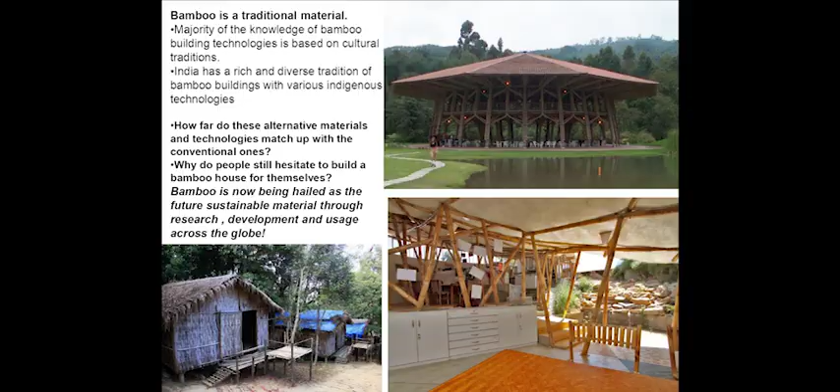I prefer the term bamboo in Indian architecture rather than bamboo architecture, because bamboo is one of the materials in architecture and has to work with all other materials. Only then can we actually mainstream the material. And though it was a very important part of our traditional architecture fabric.

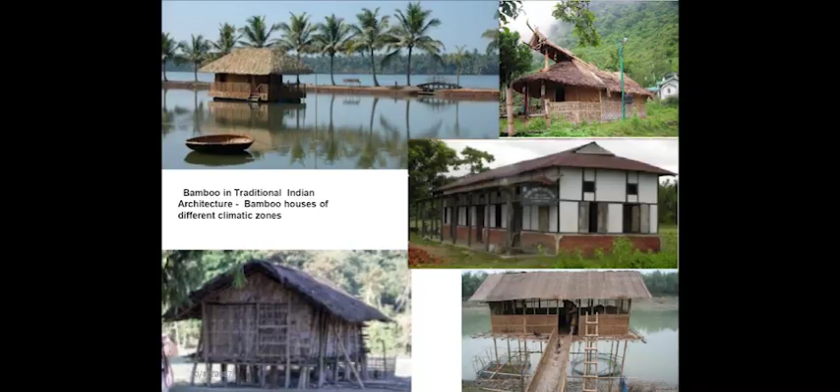It is always better to term it as bamboo in Indian architecture. My presentation has approximately 4 parts, starting with the traditional value of bamboo in our traditional architecture, and how different climatic conditions give rise to different typologies in this country. Then last year we tried to evaluate how to mainstream bamboo, because that is one of the main problems we architects face - the acceptance of bamboo in the architecture and building field is very, very less.

So we did a global survey, which I will share with you. Then I will show some of my key projects, and in the end we have a 4-minute video of one of our latest projects that we are doing. So we'll just quickly start with our presentation.

Bamboo is a traditional material in the tropical, subtropical, and subtemperate parts of the world, and is a very important part of our lives, more so for housing. In our part of the world, bamboo was primarily used as a structural material for housing - it gave us beams and columns in different parts. We have a very rich and diverse tradition of bamboo buildings with various indigenous technologies.

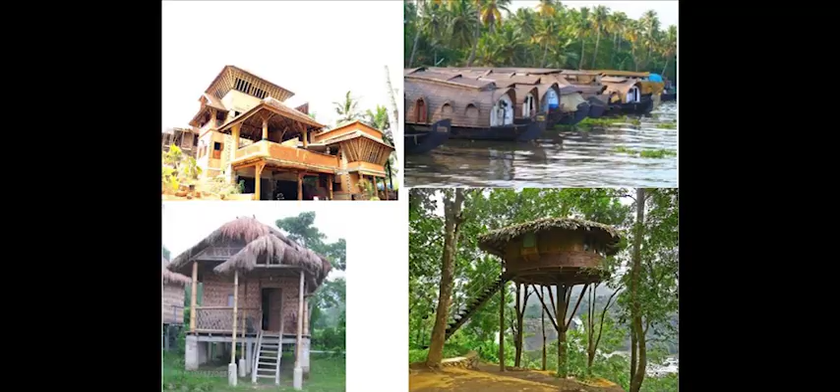Now the question this paper addresses is how these alternate building technologies can be mainstreamed, unless we understand the value addition - if we are going to replace something like factory-produced cement and steel, can we give the durability factor and other factors of comfort with materials like bamboo and mud.

Only then will people actually be ready to replace other materials with this, because some time ago cement was the alternative material and bamboo and mud were the mainstream materials. Even now in many parts of the world it is still so. How do we change it back?

This slide shows that when we say bamboo and mud, the kind of shack shown at the bottom is what comes to people's mind. On the top right is Simon Velez's pavilion at the 2000 Expo Hanover, done about 19 years ago at the turn of the millennium. And at the bottom right is my office, which is the last project I'll be showing.

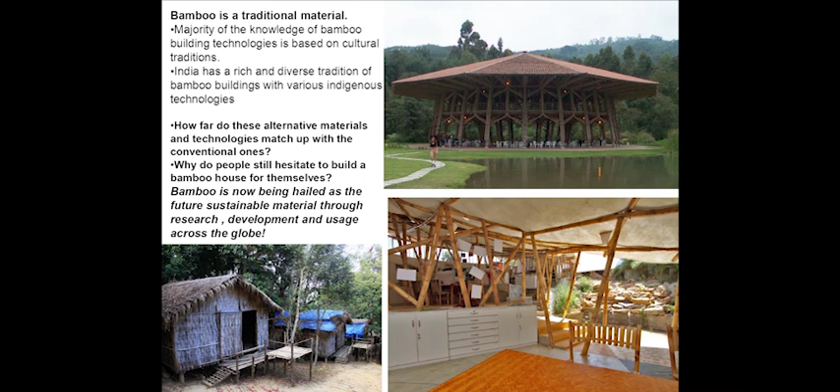These are the different traditional usages of bamboo in architecture in India. We have five different climatic zones, but the typology of bamboo buildings in India would probably be more than 150. This is because in the industrial world we think one technology and one solution fits all, whether it is New York, India, Bangalore, or the Northeast.

We think we have one solution that will fit all, but when working with natural building materials, it is not so. We have to be more sensitive toward the material and how to deal with it. These traditional solutions were found by people who had access only to the materials around them, with limited communications and transportation, and they solved their own problems of climatic comfort. These indigenous technologies are really time-tested.

I want to differentiate between two things: something tested in a lab that gets a scientific result is called knowledge. But something tested for thousands of years in live conditions, in live climate, is called wisdom, and that comes from experience. Knowledge might fail, but wisdom will not.

So what we need to do right now is combine the two - combine the wisdom gained through our traditional buildings with the scientific knowledge of the industries and laboratories, and come up with something new.

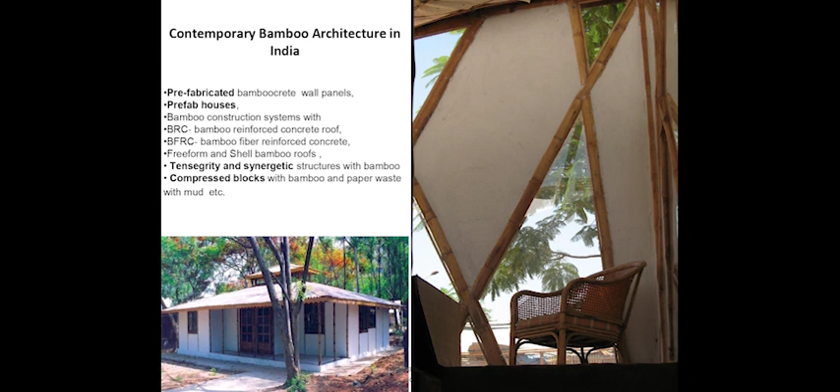The left one is again from Nagaland, and some of them are from Assam. The one on the right, at the bottom, is a house from Bangalore, more than 200 years old. You can see bamboo in the roofing there, combined with teak wood, which is a hardwood, but bamboo is also surviving for 200 years. It has not been changed. It has a limestone slab over it, and the house is in active use at the moment, 200 years old.

So when you talk about bamboo being absolutely temporary for a building, we really have to think about different construction systems to make it permanent in the long run.

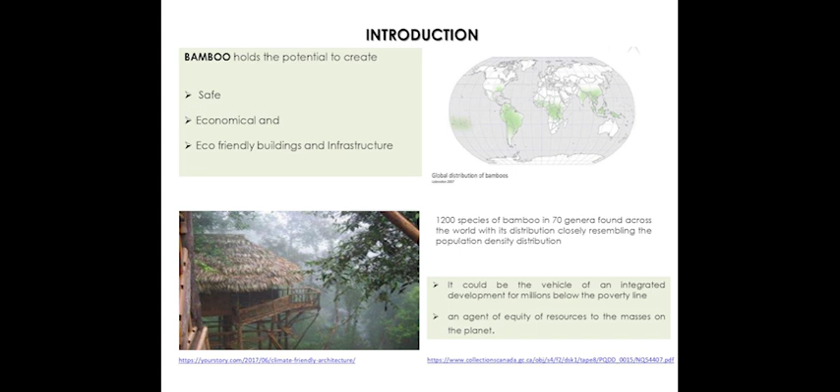These are some of the technologies we are trying to work on: prefabricated bamboo houses, prefabricated bamboocrete wall panels, which could be one new industry for multi-storied buildings. Prefab houses, bamboo construction systems with bamboo reinforced concrete, fiber reinforced concrete, like an RMC instead of plastic fibers used for minimizing cracks in plaster and other things, and also in concrete. We could actually be using bamboo fiber, which is also very, very strong.

And we can also be using freeform and shell bamboo roofs, because these days everyone is talking about these freeforms, large roofs and things like that, very much for stadiums. We can't have the normal, conventional RCC slabs. So shell roofs are the new norm, and bamboo seems to be one of the materials that could practically be used in this kind of form.

And also compressed blocks with bamboo and paper waste. This is some of the products that I have also tried to work on in my different buildings.

And I will go to the acceptability that I was talking about. This is a global survey that we did last year with support from World Bamboo Organization and ArchDaily. I will just quickly go to the results directly in this. We did the whole survey about why it should be done, and we published it globally. We got a lot of results.

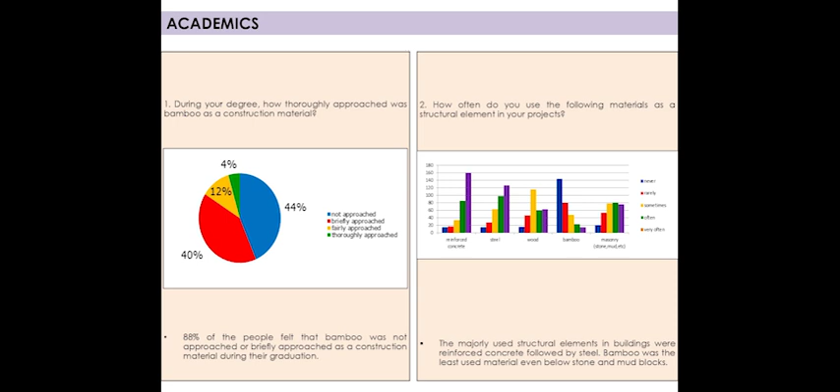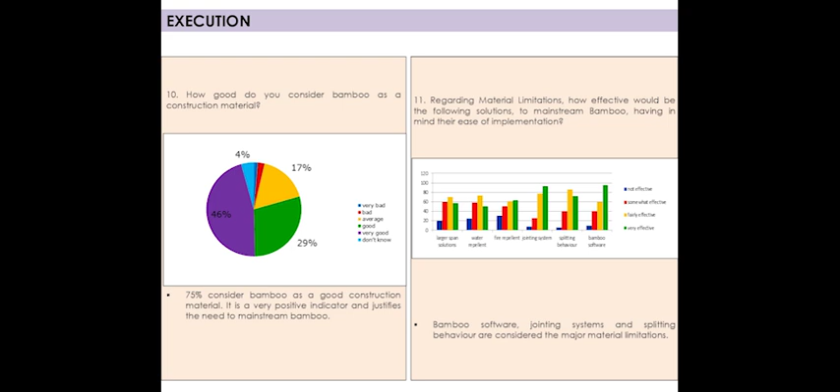These are the kind of steps that we took. We had the responses, and this is the formulation of the global survey. The responses received were limited maybe because some platforms did not allow this to be shared in other countries. Most of it was from the Asian region, but still we had quite a bit of results which came out of this. It would take a lot of time if I go through this, but you can see here different kinds of results.

We still need to do a lot of work. People still do not take to bamboo. They are not taught bamboo in the colleges. We are trying to do a lot of work, but there are different areas where we need advocacy, skill development.

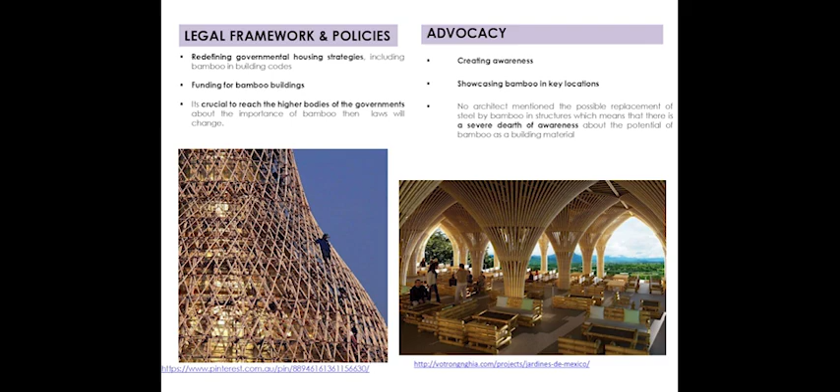And why I am showing this here is that we have done a very structured survey to come up with action pointers based on these kinds of heads. We want to show, in this platform, because it's an international platform with all kinds of people here, that we all need to work together.

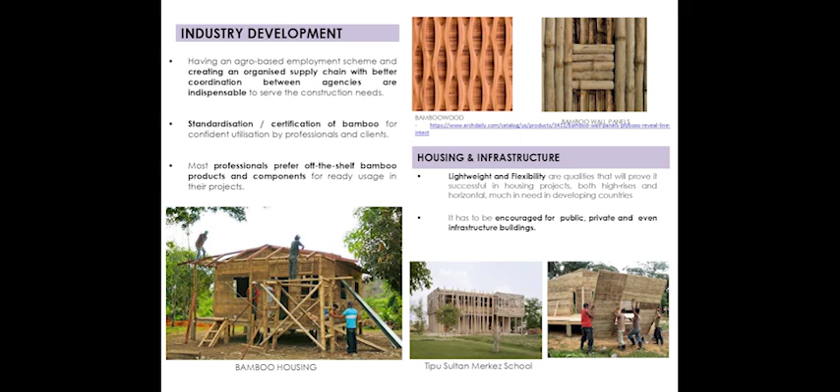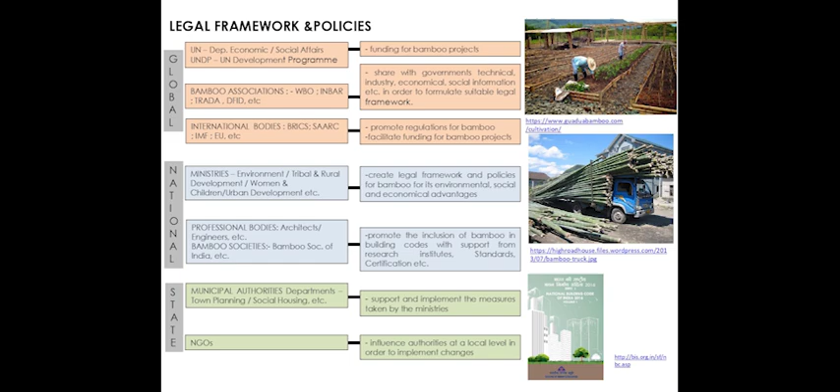This is the kind of thing where we have to really have a systemic plan, right from the World Bamboo Organization, inward to absolutely the block level in our districts, in our states and in our cities. We really need to connect them vertically, so I have tried to put it out in global, national and local platforms, how we can create change in the ministries, in advocacy, timing, marketing, and in the industry how we are supposed to go about it and which organizations could actually be working on it. Academics, how do we actually get into academics worldwide?

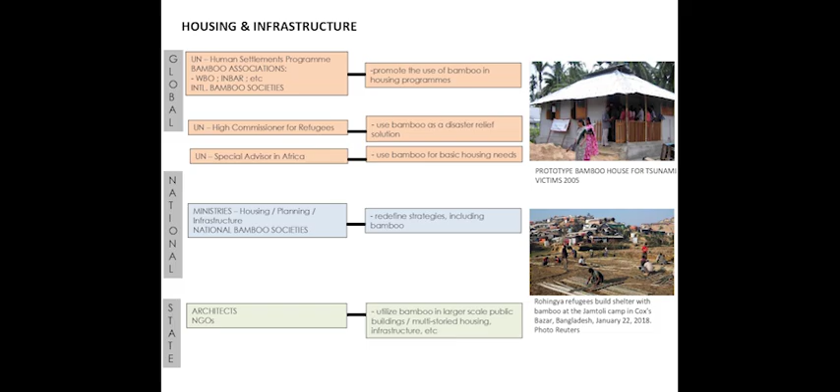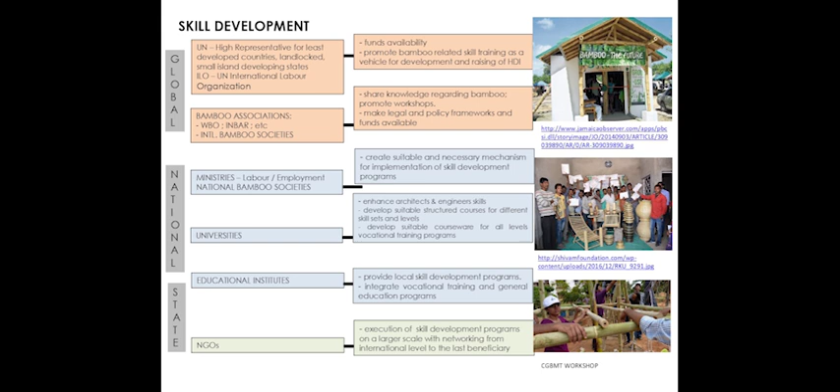The research and development should be industry based and more informed by the industry, rather than only research based which remains only in papers. These are the immediate action plans that I have, which I can share with people, and these need to be tackled from various fronts, and they are very much linked to each other.

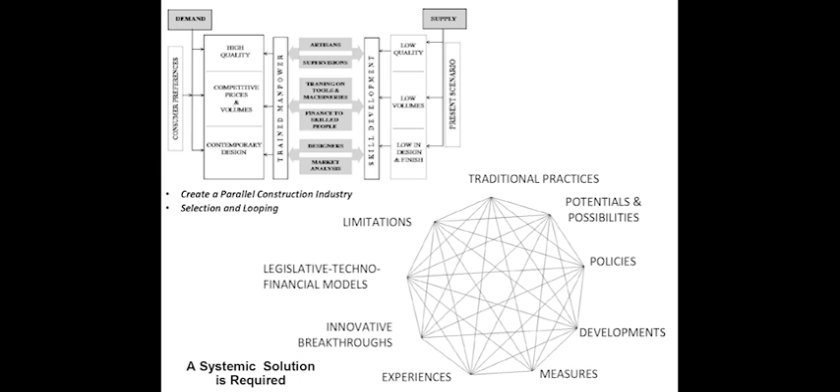We cannot be working in isolation at any level. These programs, I would be very happy to be connecting. CGBMT would be very happy if anyone wants to be a part of the program, and we would like to work together with any other organization to start this program. This is a result I have got, now I have to really start working on it. So this was one part.

I would now go to some of the projects that we have done.

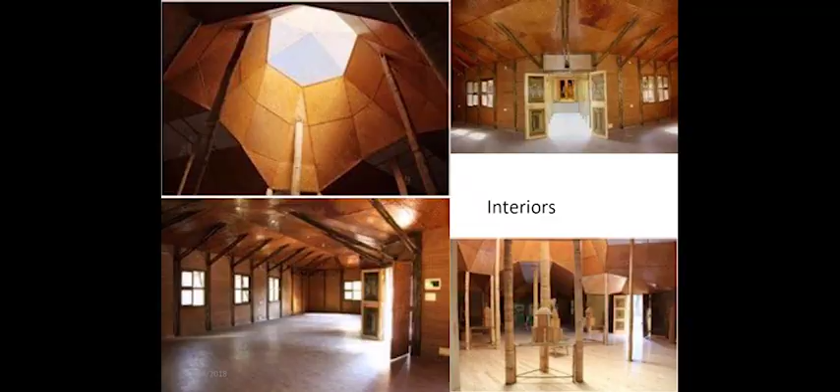This is the Bamboo Museum in Palampur, done in 2006, to showcase bamboo products. I'm showing some of the key projects in the public sector, in the public realm. This was done with SD Sharma and Associates, who gave the space requirements, and we did this.

This is in Palampur in Himachal Pradesh, and just some time back also, it is really working very well. These are the interiors of the building.

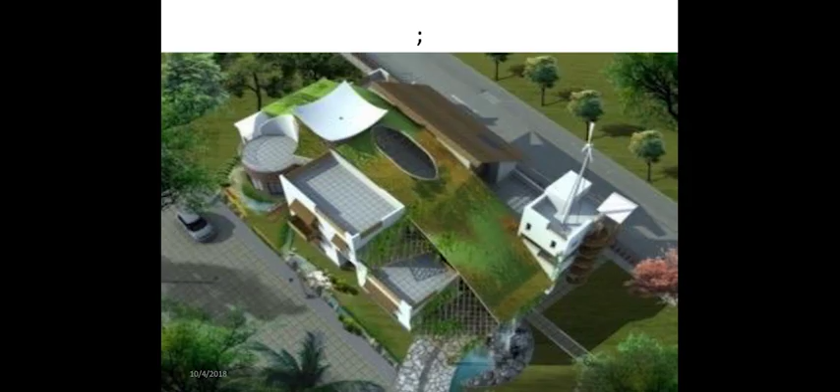This is my own house, called the house of 5 elements. This is the actual building, completely made with stone, mud and bamboo. These are 3 materials which you get anywhere in this part of the world. So we get bamboo most of the time. In case it is not bamboo, we generally do it with local timber, but this is completely from the mud, from the site itself.

We have excavated the earth and done it. The basement is made from stone, the ground floor is mud and bamboo, and the first floor is 70% bamboo and 30% mud, with just a bit of cement and steel to bind things together. So what I was trying to show in these buildings is that mud and bamboo need not be a shack. It can be a very upmarket building.

For your information, it can have very large spans. This column on the right side is taking a load across 30 feet of asymmetric loading on a single bamboo. The slab is a 3-inch slab, and the total slab area is 4,000 square feet. So that's the kind of strength that bamboo actually has, and it's a vertical, straight bamboo, not even at a slant.

What you see in the slab here is also mud, not bamboo. So I have tried to combine these 2 very humble materials to get a very contemporary architecture. You need not always use concrete, cement and steel to have these kinds of upmarket, contemporary houses. These are all photographs of the house with the grass roofing.

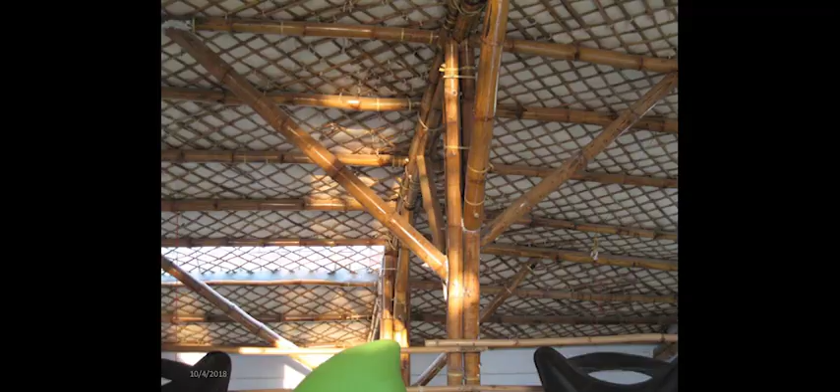In infrastructure, we put a proposal to the metro station, BMRCL, Bangalore Metro Rail Corporation, in 2013, and because of fire rating that was supposed to be tested, and auditing that was supposed to be done, we are still waiting for some kind of approval from them. There are 3 different proposals that I have given to them, and I am hoping very soon we will be able to do at least one bamboo metro station.

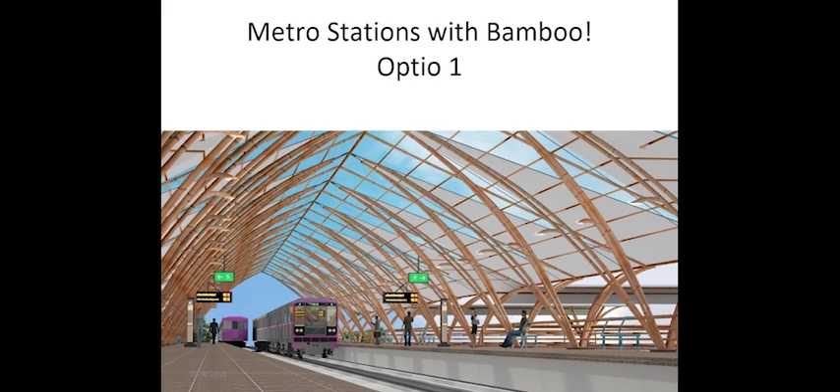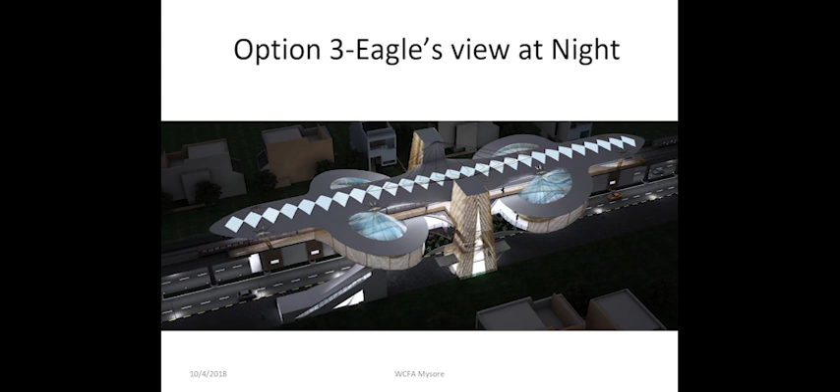I think our future is bright, because the first international terminal to have bamboo is in Bangalore International Airport in India. So I think with that we might be able to do some metro stations also with bamboo in Bangalore, which was supposed to be the concourse.

This is an 80 feet long footbridge. It was not constructed. The 80 feet long footbridge, worth 13 lakhs, was considered expensive. They said we can give 30 lakhs to steel, but not 13 lakhs to bamboo, because it will not last. That's what they thought.

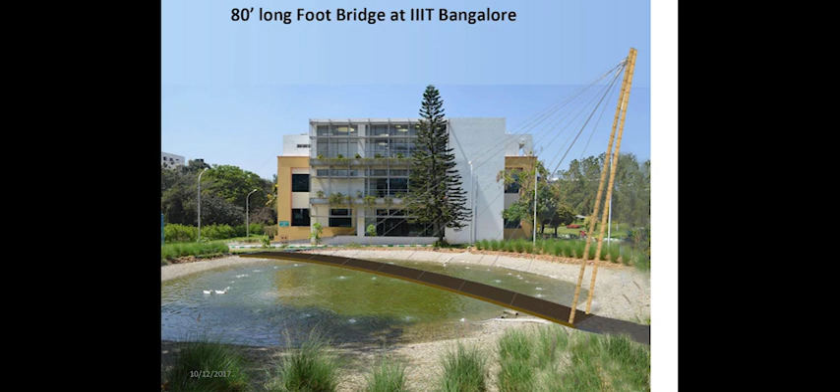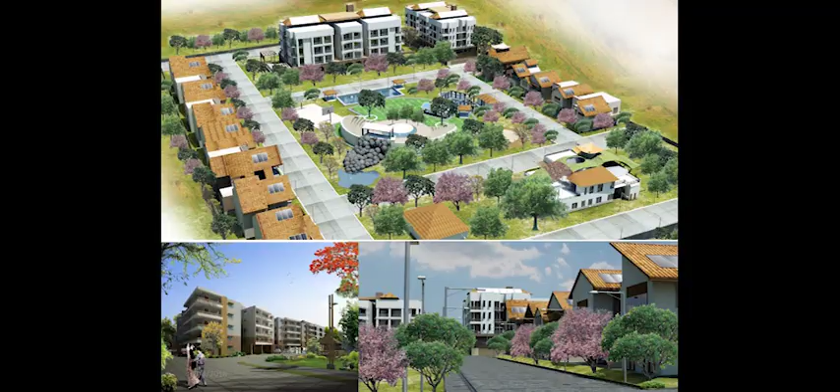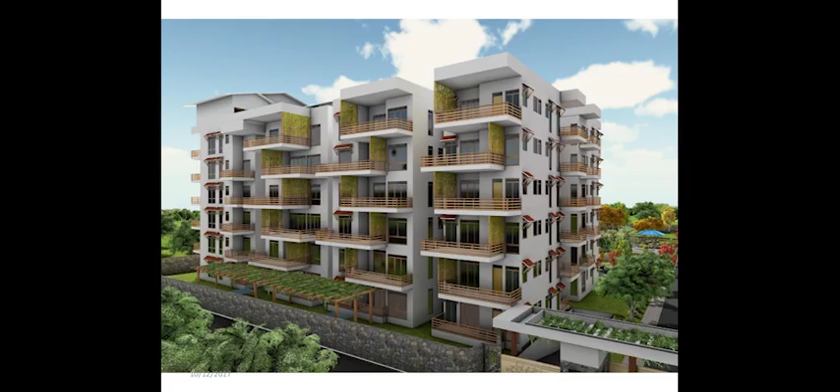This is a project that is under construction now, and we are using mud and bamboo in it. This is a whole residential development of approximately 3 lakh square feet, including community centers and everything, with a lot of bamboo in the whole project, including mud and stone. So that's the kind of thing.

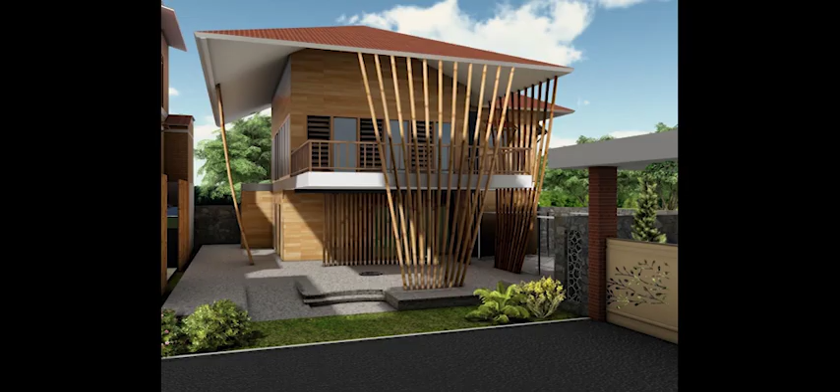Most of these villas have roofs with bamboo crete or bamboo in their framework. The community center is also done with mud and bamboo.

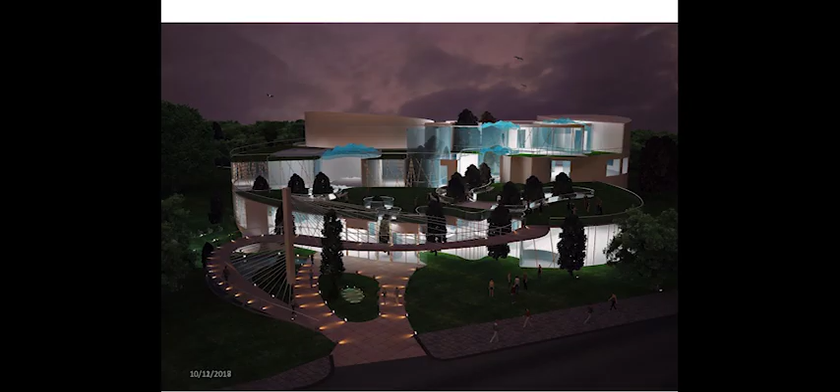This is one project we had applied for, putting it as part of a competition in Budapest, Hungary. This is not an Indian project, but they used to traditionally use lime.

I had gone there and tried to understand their traditional way of working, and they have actually been using bamboo for flutes, almost 50 to 60 types of flutes made from thin bamboo. So I have used bamboo here for musical walls, which you see in most of these.

You can hear the musical walls if you put your headphones and tap on these bamboos. It was supposed to be in a park, so I did not want to cut a single tree, and this is how it has actually been designed. So these are the musical bamboo walls for this particular project.

So these are different ways of designing. You don't always need to have very ugly kinds of things with a bamboo building. Bamboo buildings can be as good as anything else.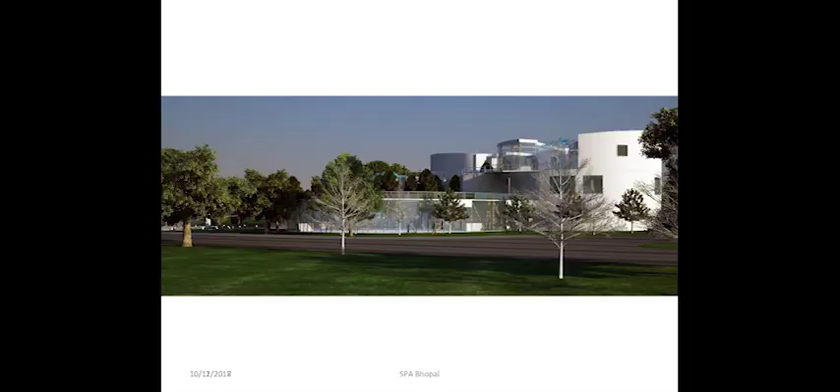This is another project which we have put up for the Gujarat government, and we are waiting for approval for this. It is also a shell roof.

This is one project which we did with Aarhus School of Architecture, Denmark, and this was nominated for the RIBA President's Award in the student category, and many other awards actually—I have forgotten now, I'm sorry.

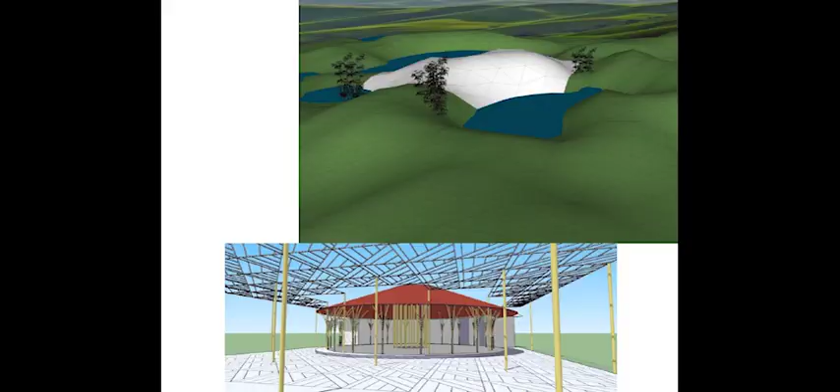But here, we are trying to use the local farmers, who are from a sericulture background. So this cocoon shape was taken, and the whole typology and morphology of the project was based on the artisans. We always make it a point to involve the local artisans.

I'm very particular about that in my projects and in my workshop. I always like to involve the ground people directly.

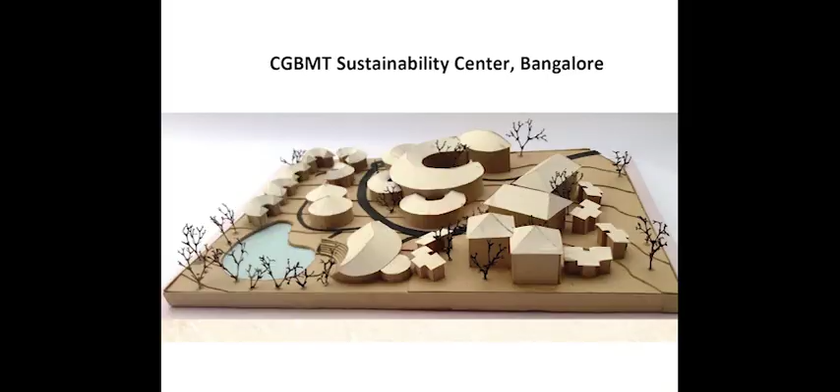And this is a center that we are probably starting work on this year in Bangalore, on a 5-acre plot.

With Dayalbagh University, we have been doing a lot of work since 2006, and I'm very happy to say we have started modular courses with them for skill development. They are ready to do any kind of MOU with government bodies for skill development in the bamboo sector, and they are planning around 200 centers for skill development in bamboo in the next 4-5 years.

So we are hoping to do it in a big way. They have a lot of these kinds of centers. This is their university center, which is again about to start construction.

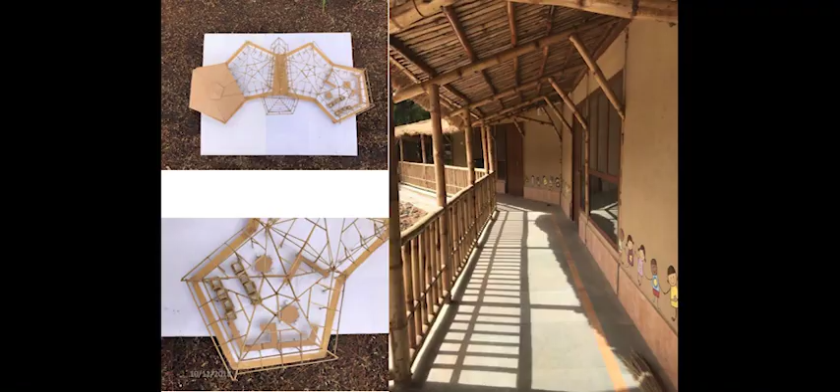This we have done in Amritsar in 18 days flat. This is a 2,000 square foot house, and we had whole community participation, 100 people working with me. We even did solar tracking, and everything from furniture to furnishings was done in 18 days flat. This is a permanent building.

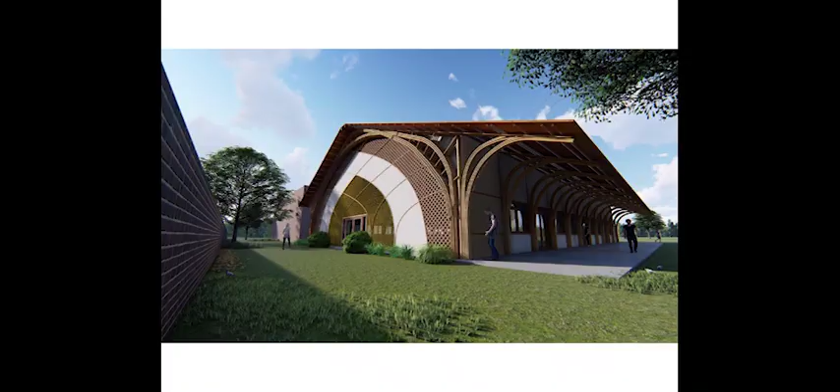This is a creche Dayalbagh University has done for their staff, as they wanted the children to grow in a very organic environment. So we have done this again in mud and bamboo in Agra. This is another photograph of the same project.

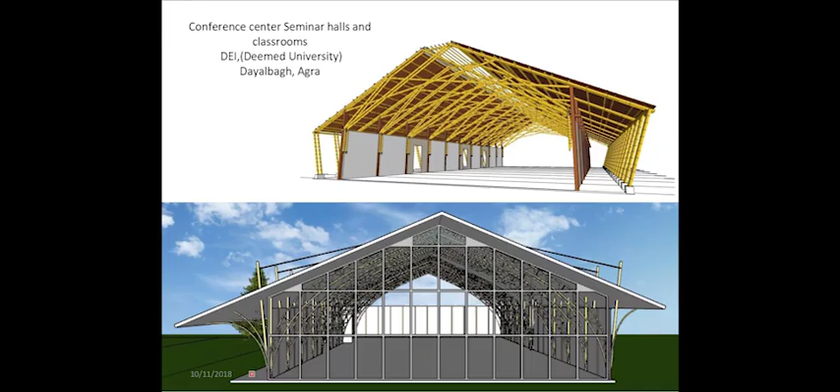We are also doing two conference centers for them with bamboo and wood, with a very large span. We have done initial testing, and construction has already started for one of them—we hope to finish in another 6 months. These are the 3D visuals of the conference center, as you can see.

What you see as the Mughal style is because of the place in Agra, that we really wanted to bring in the architecture, and the stone jali thing that reflected in the bamboo. This is the second conference center that we will be doing there.

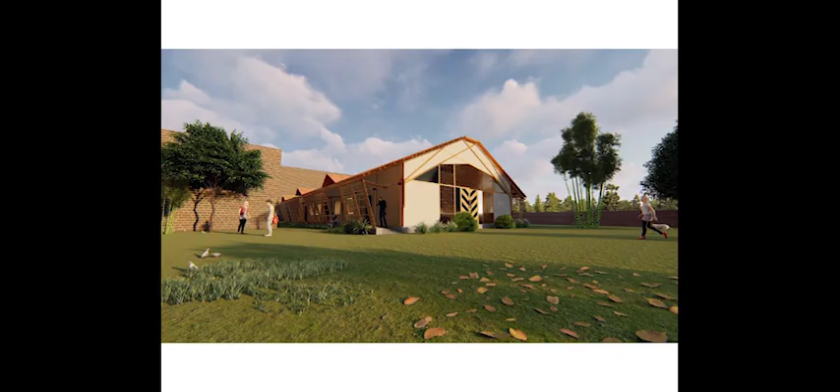With them, we are also working in Madhya Pradesh on a workshop project, with the Madhya Pradesh Bamboo Mission, which we are planning to start very soon.

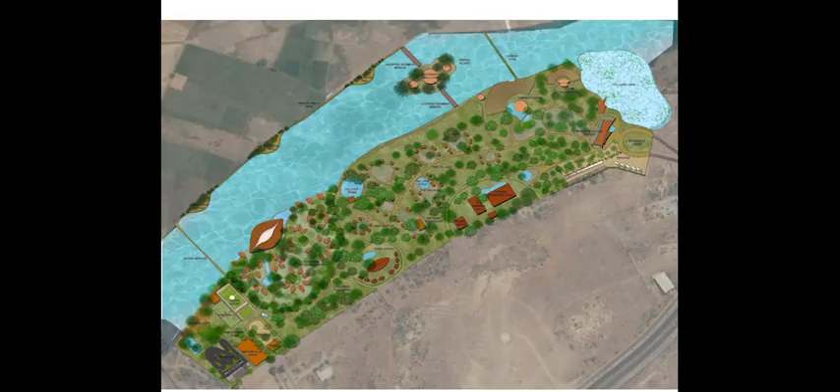This is Shilparamam, one of our prime projects with the Andhra Pradesh government, worth 170 crore on 80 acres of land. This is one of our very plum projects, and we feel that once we finish it, we'll place bamboo in a very different kind of bracket.

This is with mud and bamboo, the kind of thing, a lot of work there, very big project.

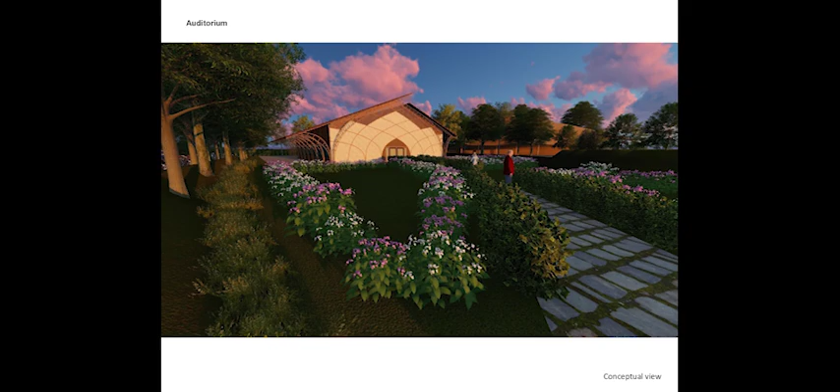This is another project, Avilala, again from the Andhra Pradesh government, around 1.5 lakh square feet of bamboo construction in this.

These are some of the buildings, 30,000 square feet, single structure, the convention center kind of thing, and you have a tower 150 feet tall, except for the core, the lift core, everything will be from bamboo, both processed bamboo and round bamboo. I always combine both of them together in most of my projects.

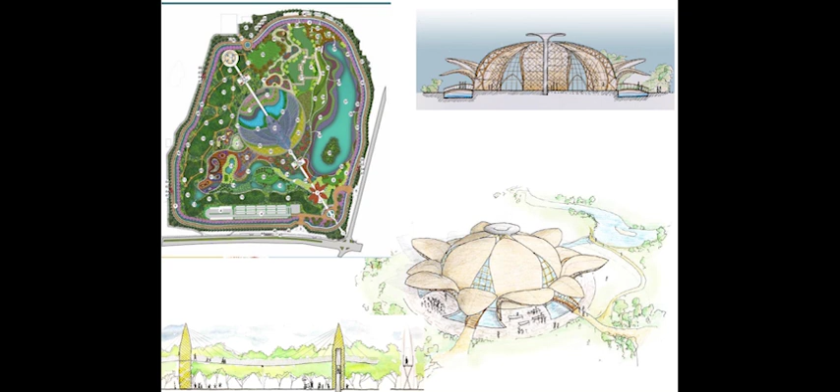I'm an architect, and I use any building material, and also any kind of bamboo, that needs to be used in my projects.

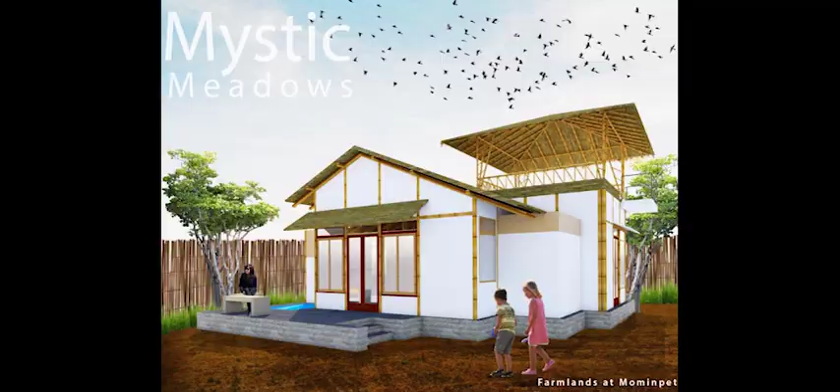This is a 120-acre residential development. 10th February is the Bhumi Puja for this, and we are doing residential development, all again from mud and bamboo, in Hyderabad, in the city of Hyderabad.

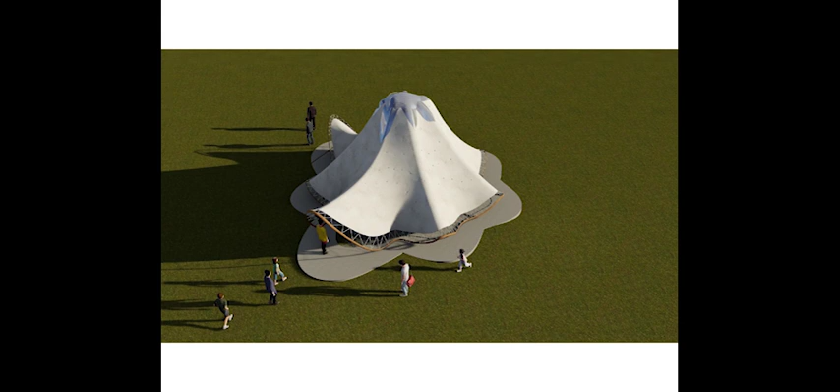This is a project which we are doing at the moment, going on. We did it as part of a 45 days workshop, a winter school we do, and this is a shell made from bamboo and mud. It's just 2 inches thick, the plastering or whatever you call it, the shell, the mix. The mix has been designed by the mud scientist from Bangalore.

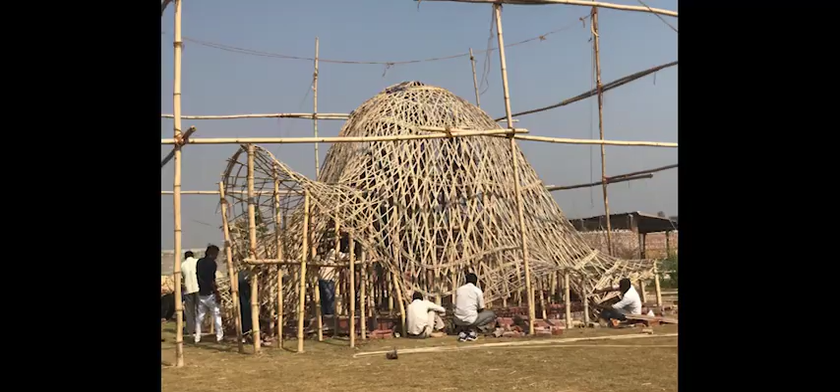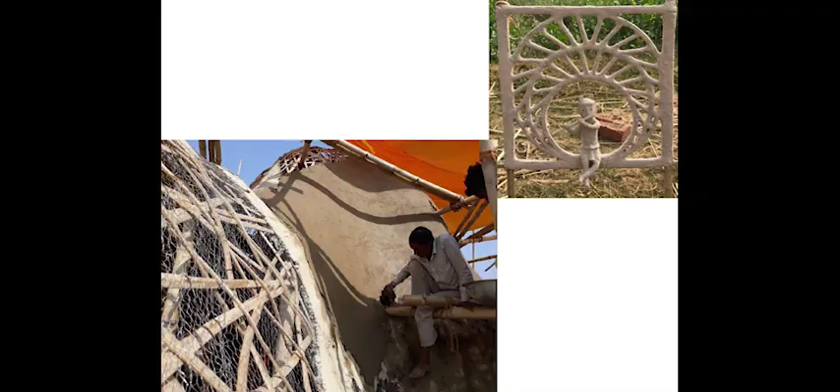This is the kind of construction photographs. We have tried to involve local people who are doing all these kinds of works, which have been done traditionally in Madhya Pradesh for a very long time, and I have integrated that into my building.

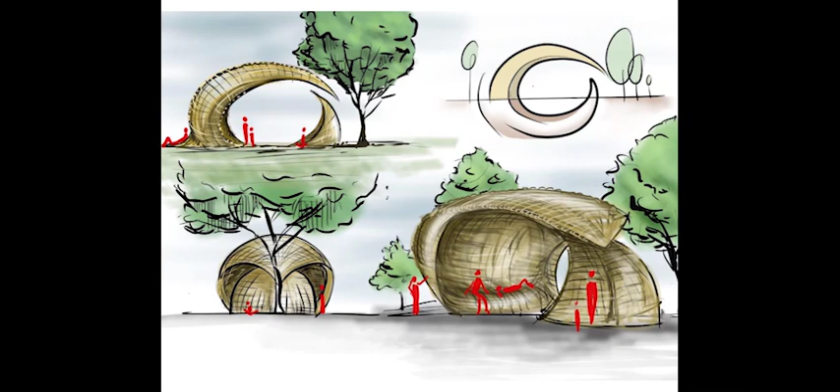So I'll be showing a video at the end of my presentation about this project. What we also wanted was to document not just the material but the processes, construction processes, and INTACH, the Indian National Trust for Art and Cultural Heritage, has come forward to document these processes. So this project involves documenting traditional processes and bringing that forward into a new kind of building vocabulary.

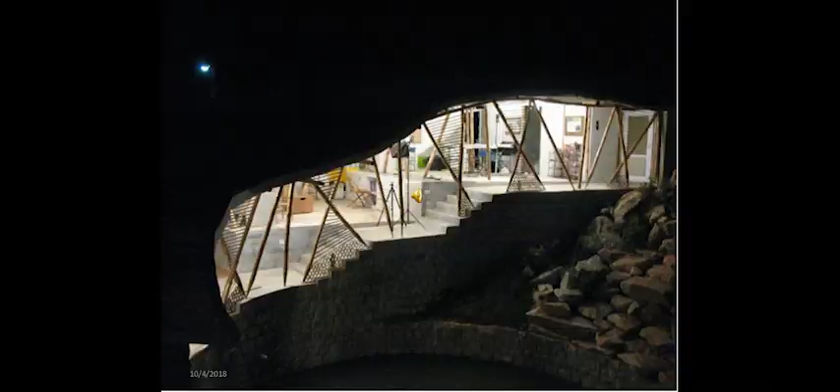This is some of the photographs of the projects, and of course the India Pavilion, which you will be seeing after some time, so I am not putting the pictures of that. And my most favorite project, my office.

I would just quickly like to run through the slides. This is based on fishing platforms, where people have been using this technique for thousands of years. They look very fragile, but they are very, very strong, and I wanted the whole structure, because bamboo is very strong though it's very thin to look at and hollow, but it's very strong.

I wanted to bring that character of bamboo into my office. How do you have very light columns taking a heavy load? That was the way I worked on this whole structure. So it's not just doing something with bamboo, you take out the inherent quality and character of the material into the architecture of the whole place.

So bamboo here goes all through the building, just like a strand, the way they stand in different forms, never straight completely. I'll run through this whole slide - this is how you enter, just as you enter the building, my office. This is how you see it, and all these columns are actually structural columns, not interior columns for decoration.

We had a lot of models that we had done, and out of that we came up with this structure. I did a 1-to-1 testing of this building with old bamboos, and then I replaced the bamboos and completed this building in the final form.

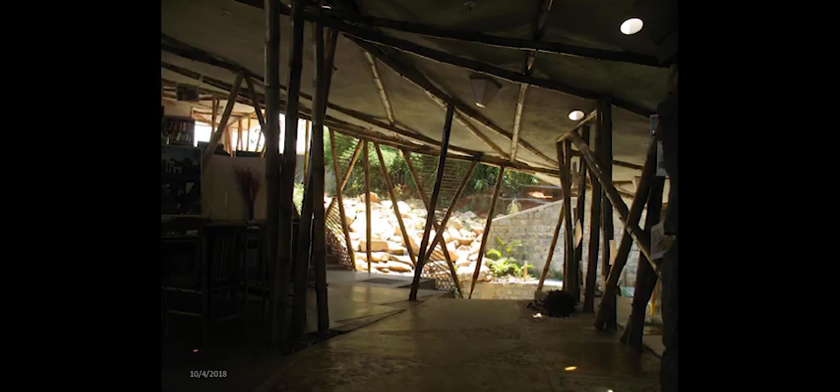This slab is reinforced with bamboo, and the concrete has bamboo fibers in it. This project got the LaFarge Innovation Award, the Arcasia Award, and was nominated for the Aga Khan Award. There are various things happening with bamboo. I feel we need a composite way to build with bamboo. Unless we do that, we cannot mainstream the material. If we want bamboo to come into the construction sector, we have to make composite buildings combining bamboo with other materials, and only then will we be able to take it to center stage.

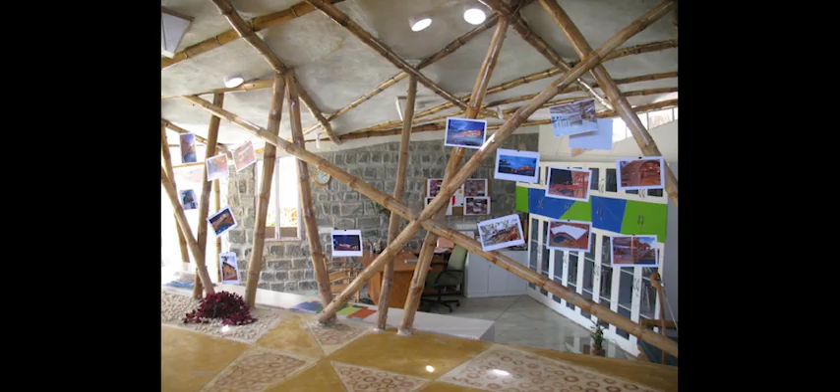So these are photographs of the office. I'm very bad with videos and things. INTACH has made the other one, so I'm just running you through my office through photographs.

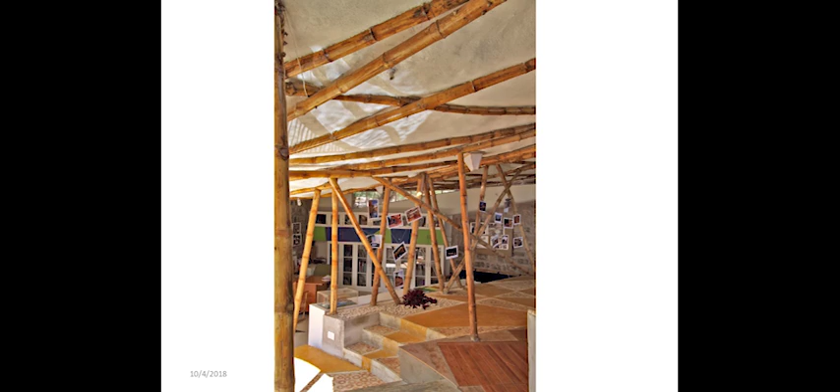So that's the office.

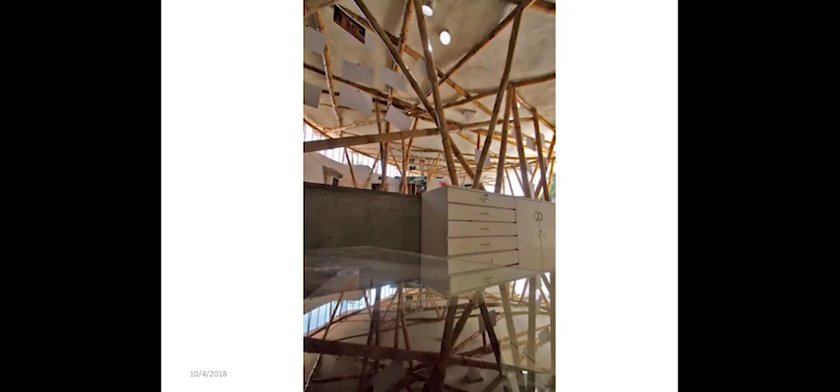I just want to say that we need to all work together, the West with the East, your rigor and our otherwise way of working. When we work together, we will be able to really define the definition of sustainable architecture for the new future. And that was us working together.

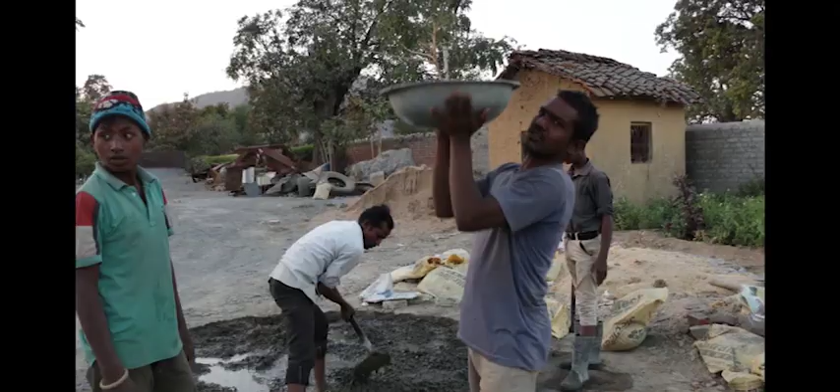I think bamboo needs a little bit of respect as a building material, along with even respecting the artisans who work with bamboo. The village people somehow get more enamored with concrete and cement because that represents wealth. It's important that they realize it's a very good material to stay with.

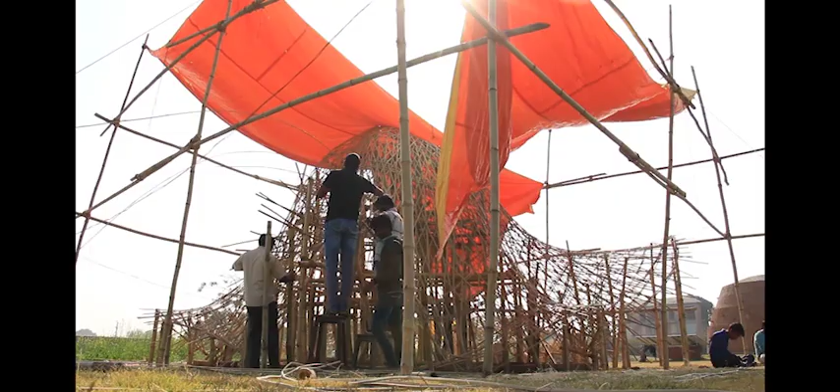Neelam is a bamboo expert, and I felt that if she could come and teach them, and bring in the seriousness of using bamboo as a building material, it would be very beneficial to the people around.

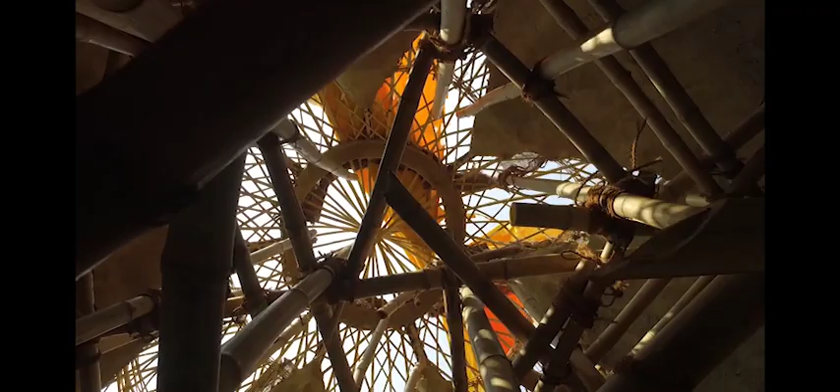The engineering quality of bamboo in this case is completely stretched to its limits because people don't do shells with bamboo. And mud, which is again a material used by villagers, is stretched to another limit.

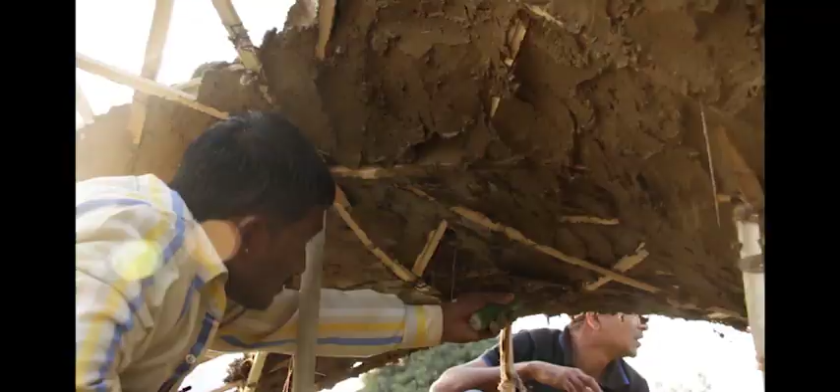So this aspiration of Ambika to have something very artistic, and my aspiration to have something cutting edge in bamboo engineering, combined with the aspirations of the people who have been working with bamboo but have not really benefited.